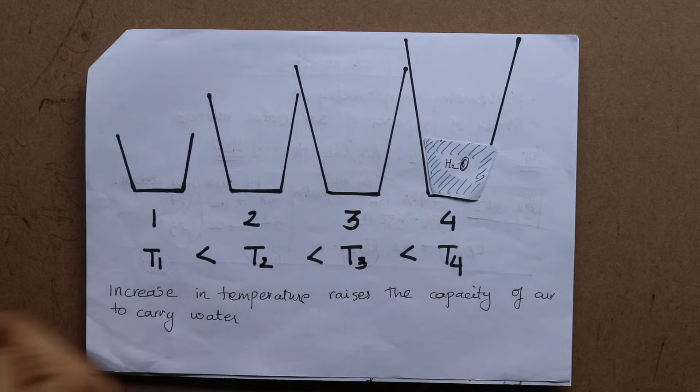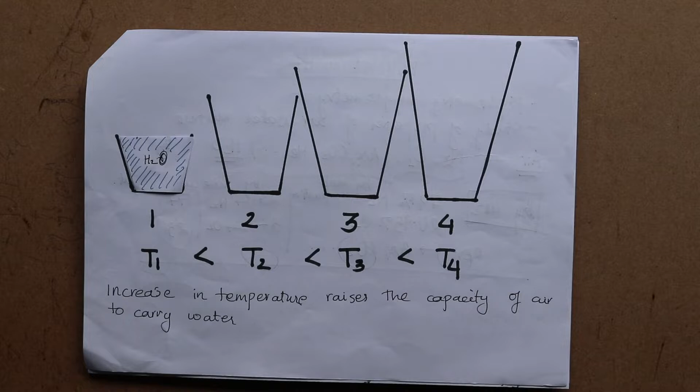Now, air, as we know it, again to reiterate, consists of dry air and water vapor. If we have ordinary air, that is air plus water vapor, and we start cooling it, what is going to happen is that as you cool it, the capacity of the air to hold moisture decreases. At some point in time, the capacity of the air becomes equal to the net amount of moisture in the air.

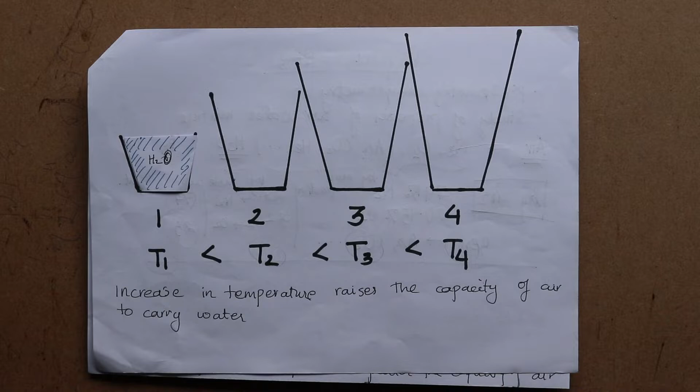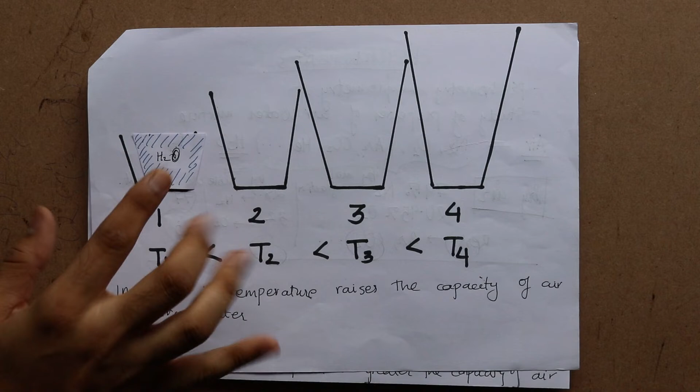The temperature at which this happens is termed the dew point temperature. Dew point temperature can be defined as the temperature to which air is to be cooled at constant pressure so that it becomes saturated with water vapor. In this condition, the air is completely saturated with water vapor—it cannot hold any more, because the capacity of the air to hold water is the same as the amount of water vapor present in the air.

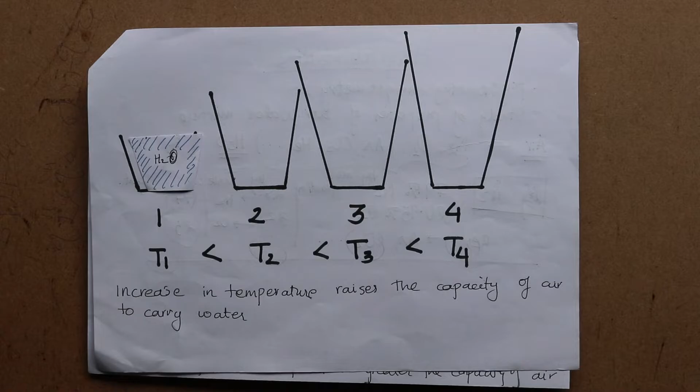Another definition we need to look at is adiabatic saturation temperature. To measure it and understand what it is, we have to look at a simple setup. Consider a long insulated channel containing some water, and air—unsaturated air—passes through it.

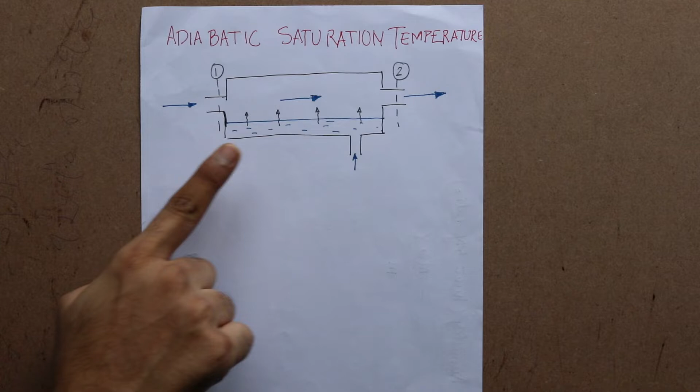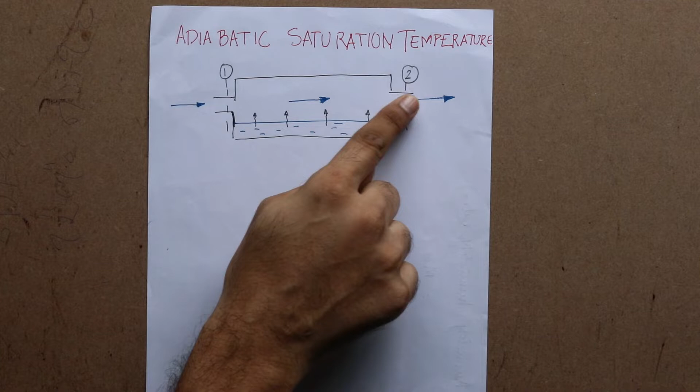As it passes through this channel, it absorbs some amount of water vapor. This channel length is such that at the end of the process, the air exiting is just saturated. As the air starts absorbing the water vapor, this causes the temperature of the air to reduce.

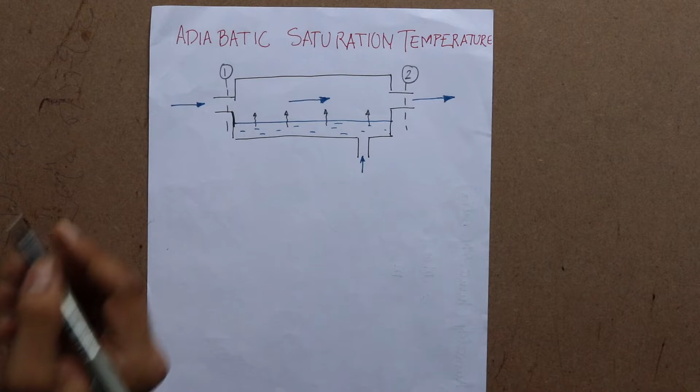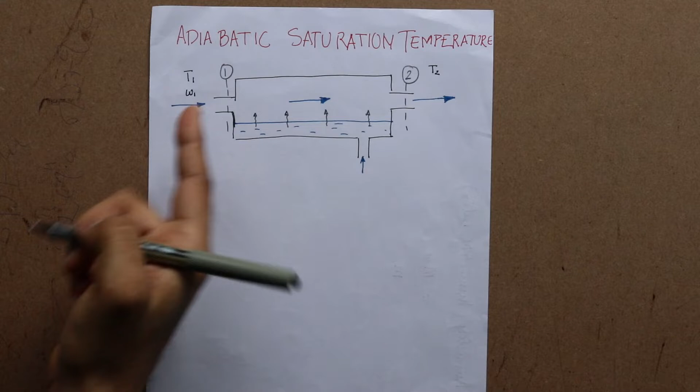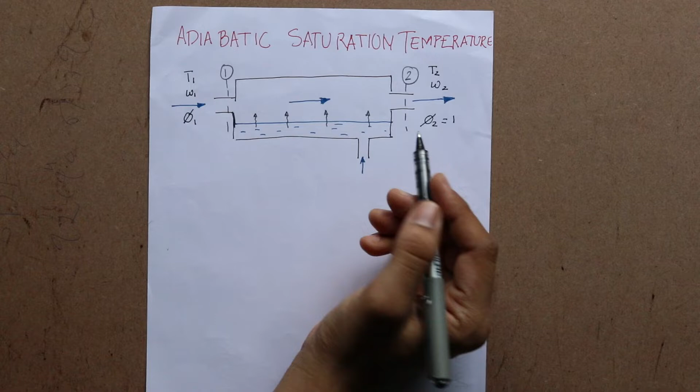Let's assume the air temperature initially was T1. After this cooling, the temperature will be T2. If the specific humidity was W1, the final specific humidity is going to be W2. Similarly, if initially the relative humidity was phi 1, the final humidity phi 2 is equal to 1, since at the end it is in saturated condition. As it is passing, an amount mf dot of fluid is going to be absorbed into the airflow every second.

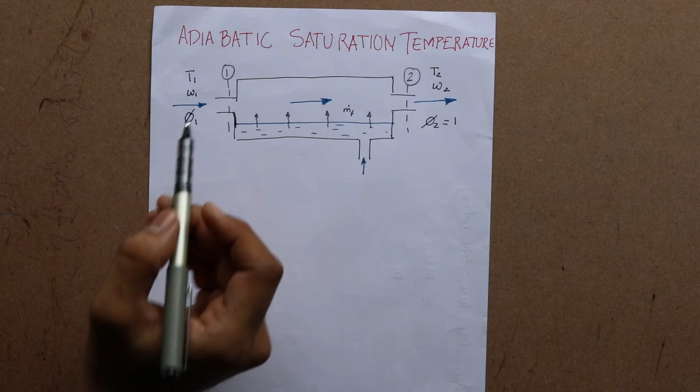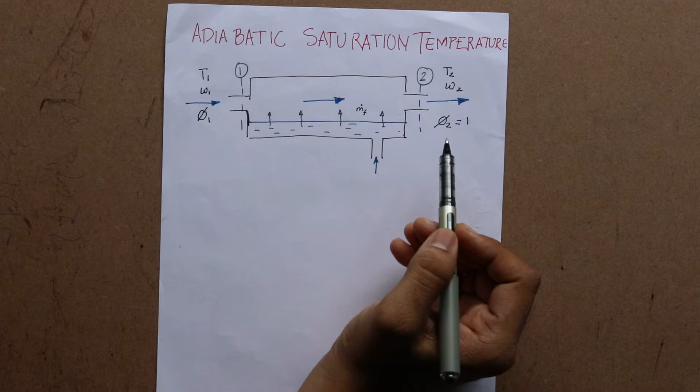To recap, we have air flowing into a long insulated channel initially at T1. This air is unsaturated, and at the final condition it is just saturated. As it passes through the channel, it absorbs some amount of water present in the channel, causing its temperature to reduce to a value T2. As the air exits the channel in saturated condition, this final temperature T2 is termed the adiabatic saturation temperature.

Now, part of the latent heat of vaporization, which causes this water to evaporate, comes from the air which is entering the channel.

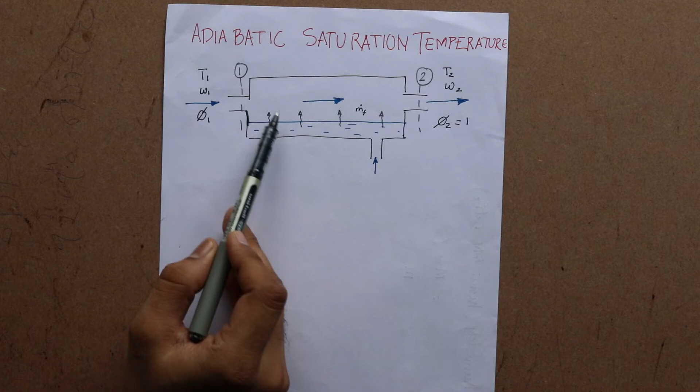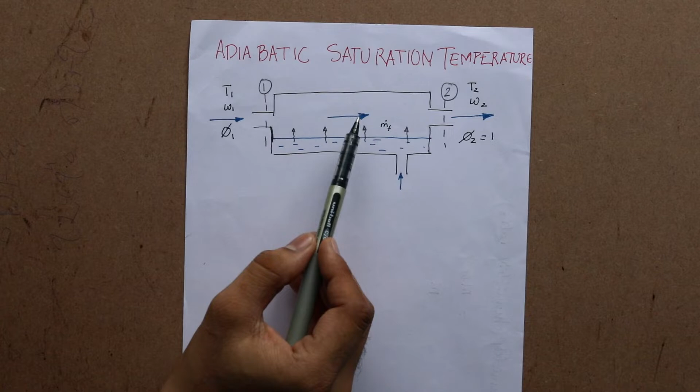Thus, this air loses heat, loses energy, which is given to the water in the channel, causing it to evaporate and mix with the air flowing into the channel.

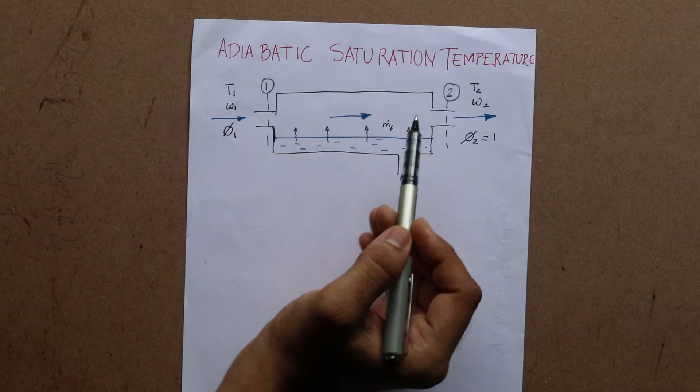Now we are going to analyze this as a steady state or steady flow process. We will assume that there is a constant amount of air entering the system and a constant amount of air exiting the system.

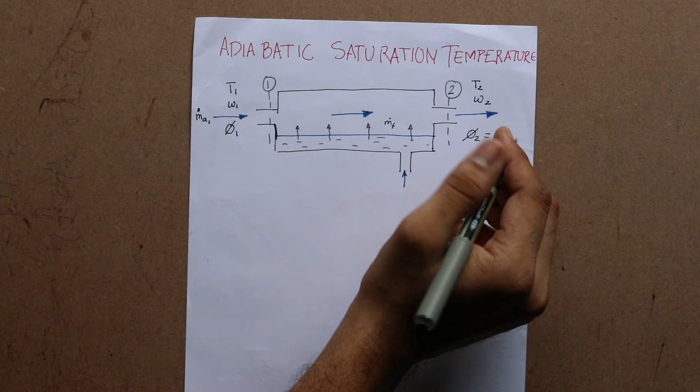Now this is dry air. We assume that the dry air entering here is MA1, or the mass flow rate can be given as M dot A1, and the air which is exiting this, even though it's saturated, the dry component is M dot A2.

Since this is a steady state flow, MA1 is equal to MA2.

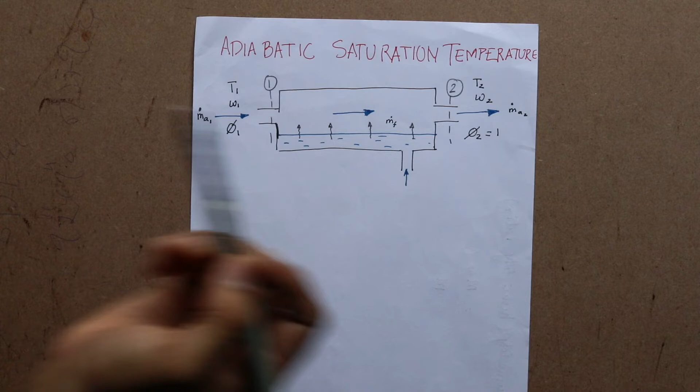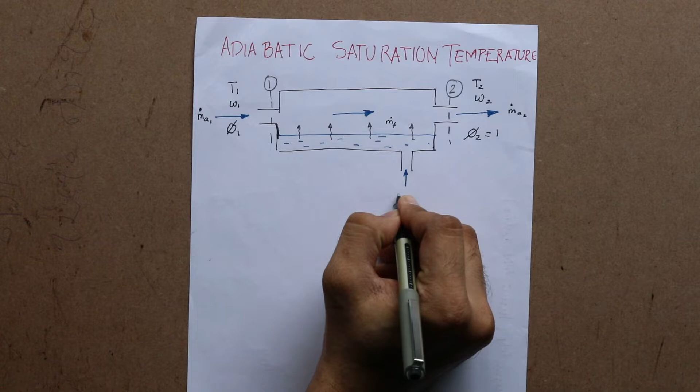Now, as we have seen before, this is also absorbing some amount of water, so naturally the water level would reduce. But since we are considering this a steady state process, we are going to introduce some amount of water, the same amount as that being evaporated. So if MF dot is being evaporated into the air stream, we are going to be introducing M dot F.

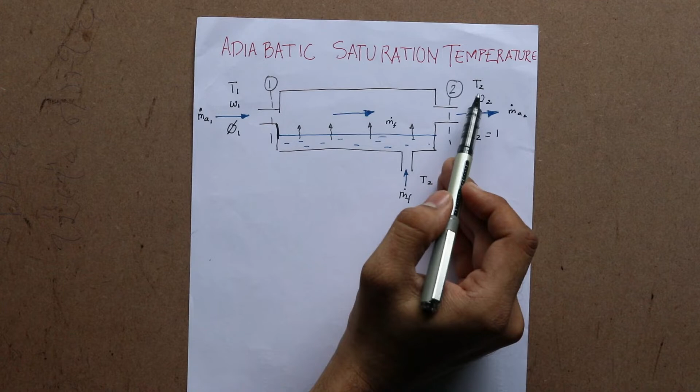Also, we are introducing water which is at the same temperature as the air exiting this - the adiabatic saturation temperature, that is the temperature of the air exiting the saturator device.

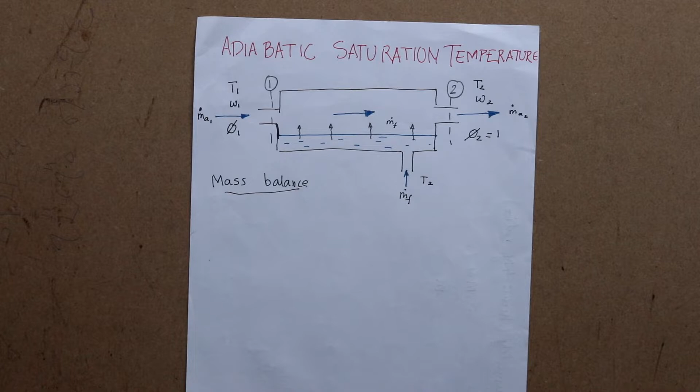So what we are going to do is analyze this mathematically. First we are going to do a simple mass balance, for mass flow of dry air.

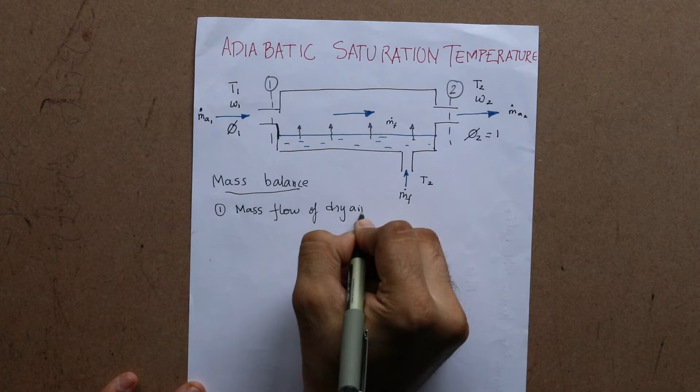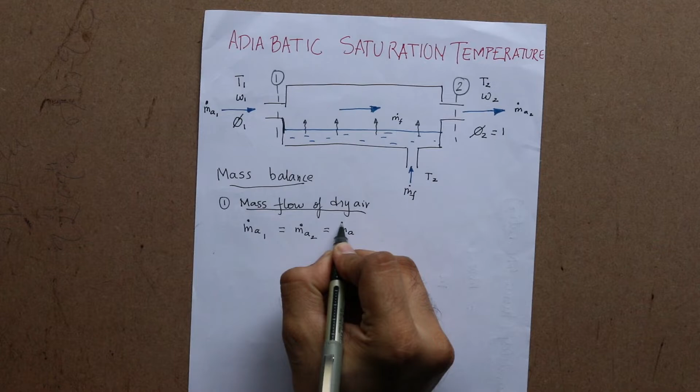Now in this case we assume it was a steady state process, so the mass entering the system is the same as mass exiting the system. So MA dot 1 is equal to MA dot 2 is equal to MA dot. That means the mass flowing in is the same as mass flowing out, equal to some specific value.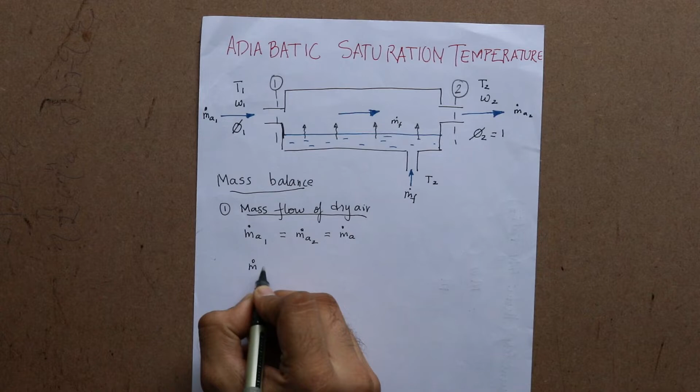Now we are going to do that for the vapor as well. So we can say that m dot W1, that is the mass of water vapor present in the air entering the system, plus m dot F, which is the rate of evaporation, is equal to m dot W2.

So we have mass of water vapor entering the system plus the mass of water vapor generated due to the evaporation process, equal to the mass flow rate of water vapor exiting the system.

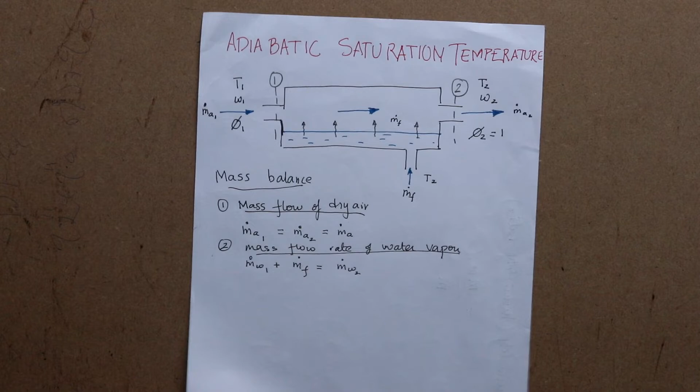Now let us simplify this. We know that specific humidity can be defined as mass of water present in the air to the mass of dry air. So we are going to substitute that here.

So we are going to get specific humidity at inlet into mass of air entering the system, plus m dot F - that's the same term - and again we substitute the same here, mass of air into W2, that is the specific humidity at exit.

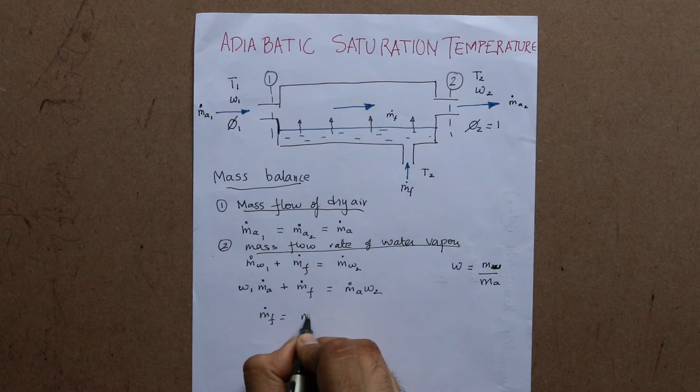Now we simplify this for m dot F, and we get m dot F is equal to m dot A into W2 minus W1.

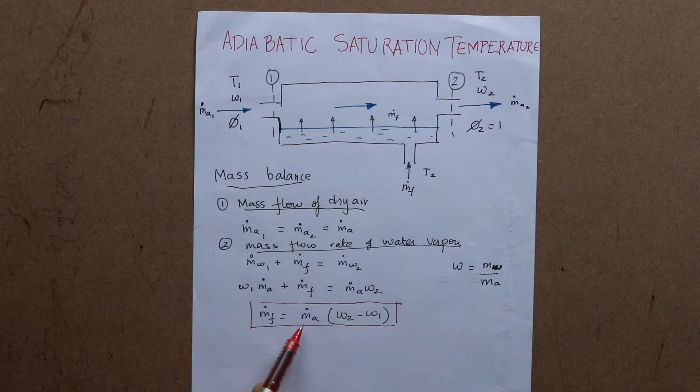So we have an equation which links the mass flow rate and the difference in specific humidity to the amount of water vapor being absorbed by the system. After performing a mass balance, we are also going to do an energy balance.

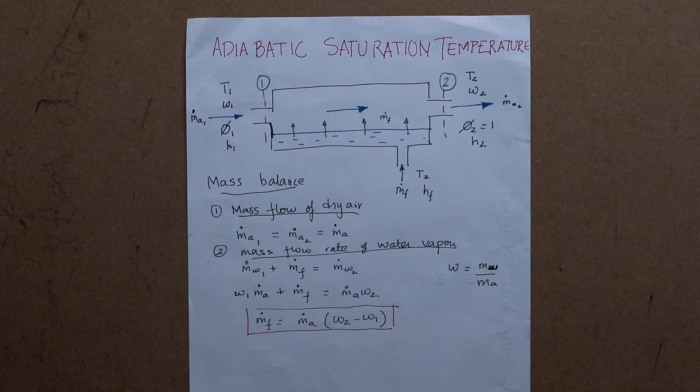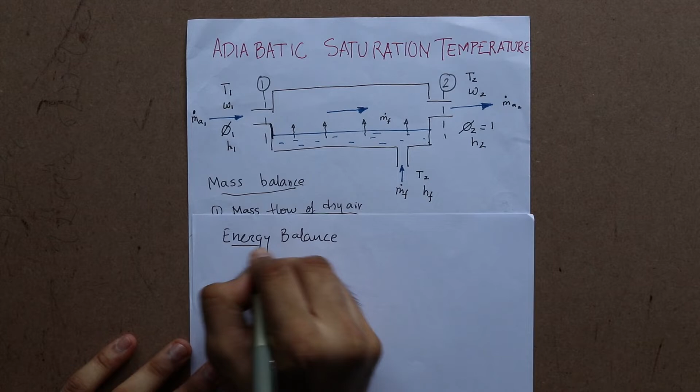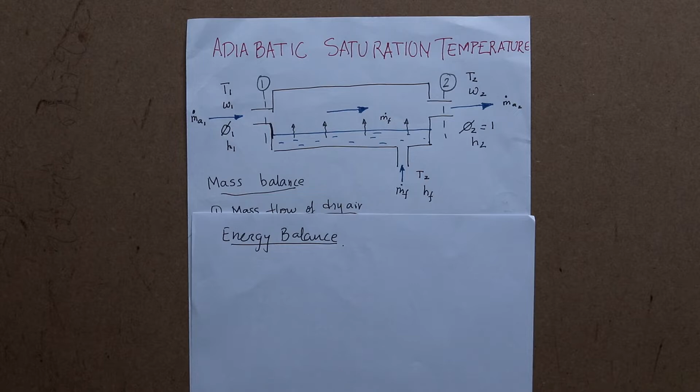Alright, so what we are assuming is that this is a steady state system, so the net energy flowing in is the same as the net energy flowing out. So E in is the same as E out.

Also we have some assumptions. One is that this is an insulated system, so there is no heat flow across the boundary, and this is a passive system, so there's definitely no workflow across the boundary.

Now the energy flowing into the system is comprised of energy contained by the air, that is the enthalpy of air, and the enthalpy of water. The energy flowing out of the system is the enthalpy of air, that is the saturated air here.

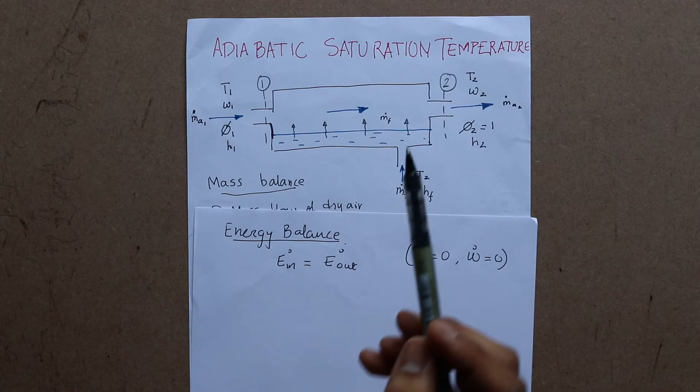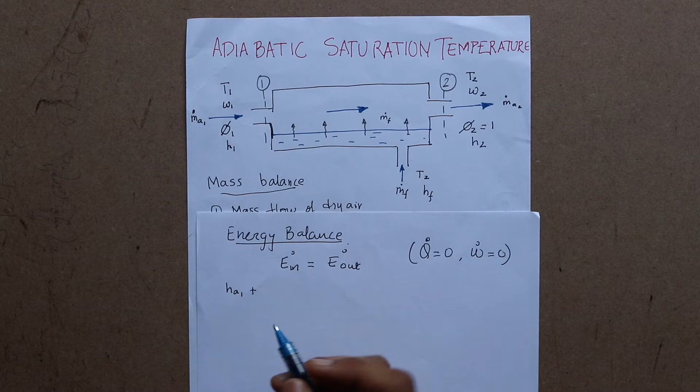We assume that the air flowing in has some amount of moisture present in it. So HA1, which is the enthalpy of dry air, plus W1, HW1, plus W2 minus W1 into HF2 is equal to HA2 plus

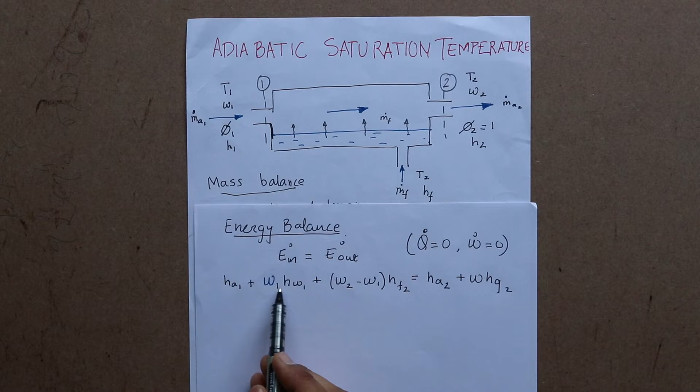WHG2. Now, what this means is that enthalpy of air coming into the system is comprised of enthalpy of dry air plus enthalpy of water vapor present in the air. That's why it's just W1 into enthalpy. So it is specific humidity into the enthalpy of water vapor in the air at the inlet, plus difference in specific humidities, that is the enthalpy of water due to evaporation, is equal to HA2, that is the enthalpy of dry air at outlet, plus enthalpy of water vapor at outlet.

Alright, now what we are going to do is we are going to solve for W1, and once we solve for W1 we are going to get the following equation.

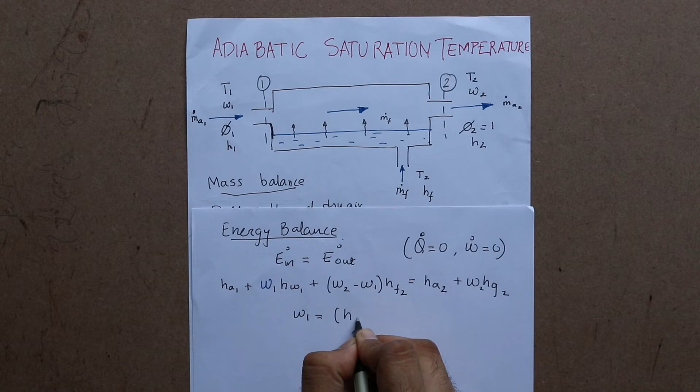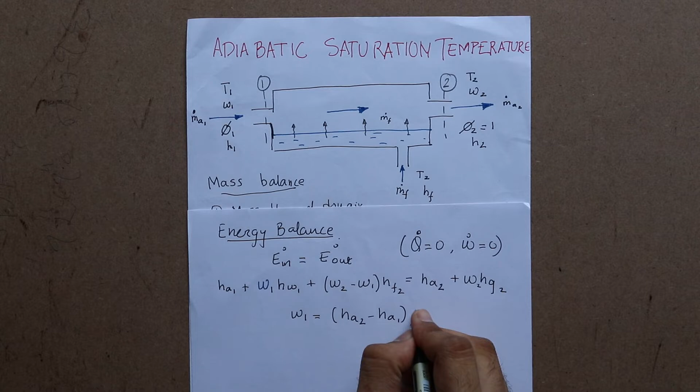W1 is equal to HA2 minus HA1, that is the difference of enthalpies of dry air, plus W2 into HG2 minus HF2, whole divided by HW1 minus HF2. We simplify this further.

So we can simplify H as Cp dt. So Cp of air, T2 minus T1, plus W2 into HG minus HF, which is equal to HFG2 divided by HW1 minus HF2. This is equal to W1.

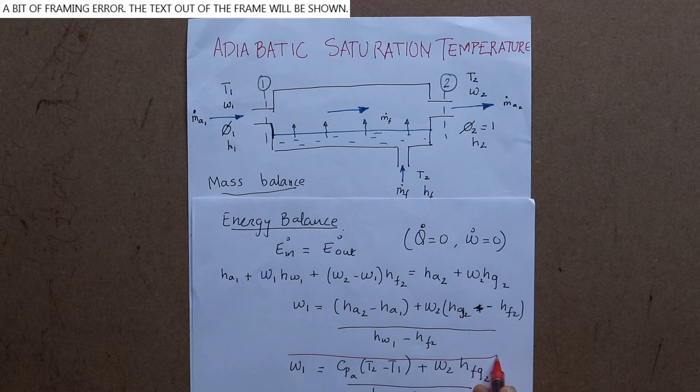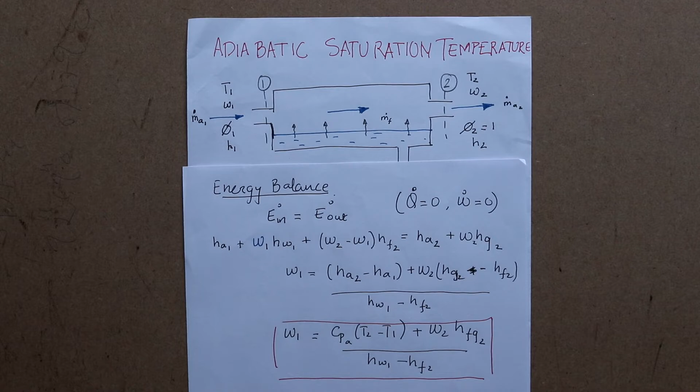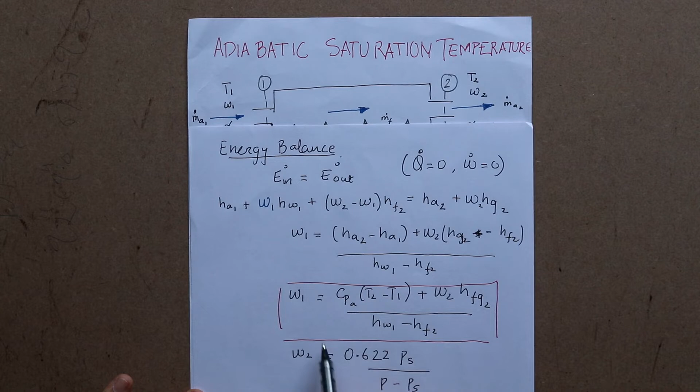Now, W2 in this case is equal to, from earlier, 0.622 PS upon P minus PS. This is coming in from your earlier last class, where the specific humidity at saturated condition, you get this formula.

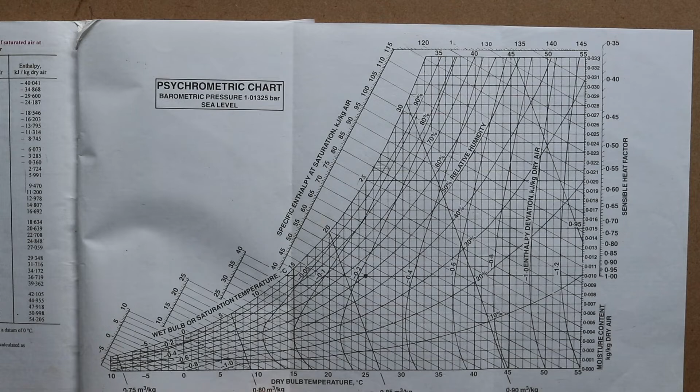In psychrometrics, to obtain different values of enthalpy, specific humidity, etc., we make use of something called a psychrometric chart. Psychrometric chart is nothing but a plot of dry bulb temperature versus specific humidity.

Now, this plot also has values for specific enthalpy, wet bulb temperature, and volume of the mixture, specific volume of the mixture, amongst a few other values. Now, here we see increasing values of dry bulb temperature on the x-axis, increasing values of specific humidity on the y-axis. On this curve, we see increasing values of wet bulb temperatures.

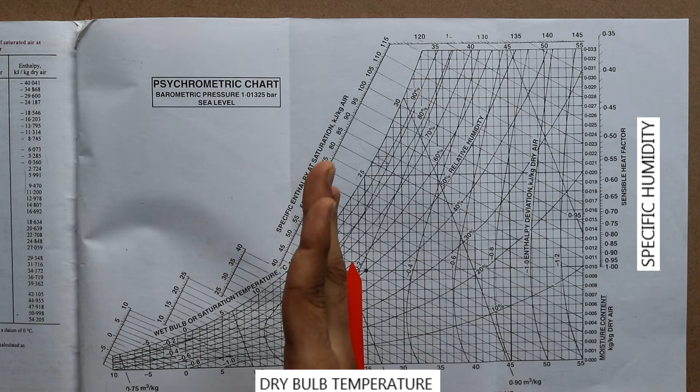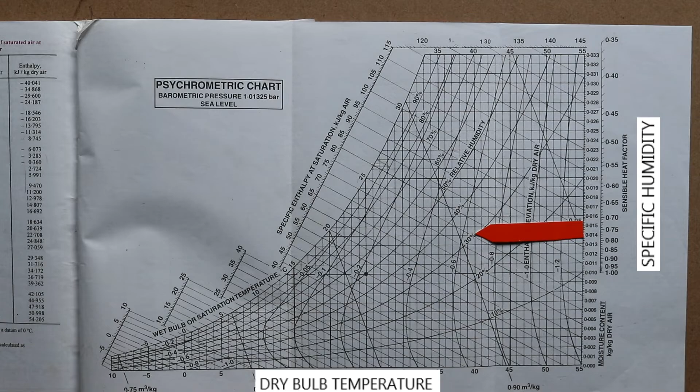We can see increasing values of wet bulb temperatures. Now, constant values for dry bulb temperatures are in this direction. That means if you travel vertically upwards, they are going to be constant dry bulb temperature lines, and if you travel horizontally, they are going to be constant specific humidity lines.

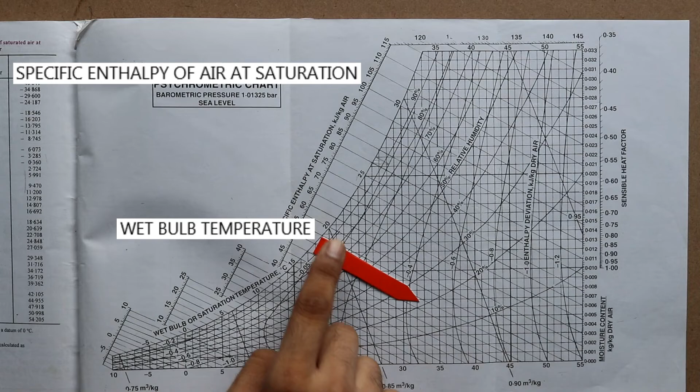Here we have the wet bulb or saturation temperature values at the edge. Now these saturation temperature values are constant along this direction. You can see lines along this direction, along which saturation temperature or wet bulb temperature is constant. Also, you have values for specific enthalpy at saturation. Now these lines are collinear to the wet bulb saturation temperature lines, so the lines of specific enthalpy at saturation coincide with the wet bulb temperature lines. Alright, so they both have the same lines in this direction.

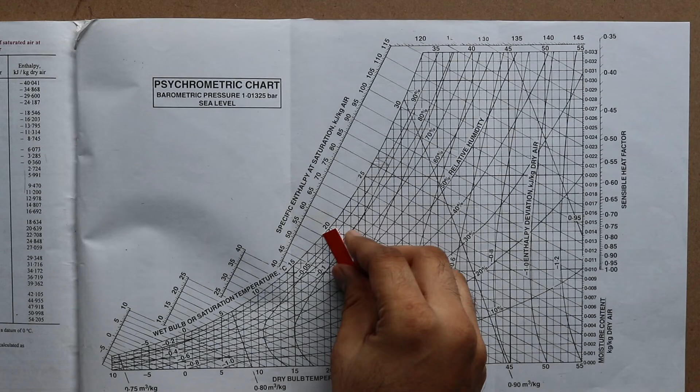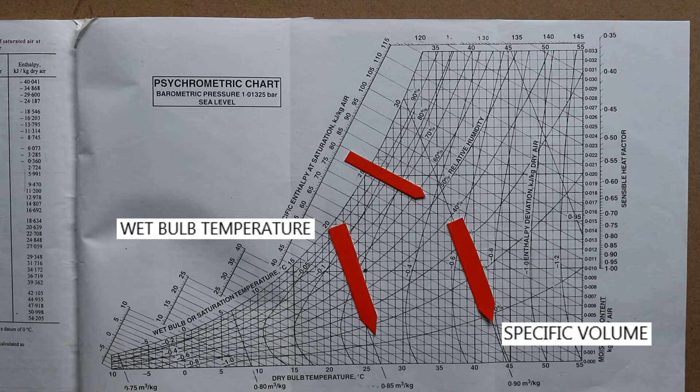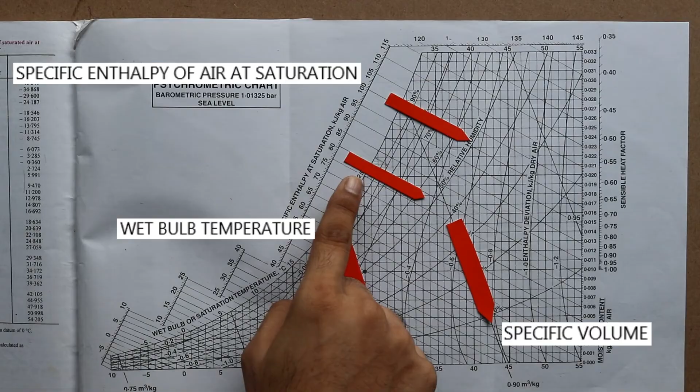Also, you have the specific volume lines. Now these are slightly different, they follow these lines. So you have got constant wet bulb temperature lines, and you have got constant enthalpy lines. You have got constant volume lines, and you have got constant enthalpy or wet bulb temperature lines in this way.

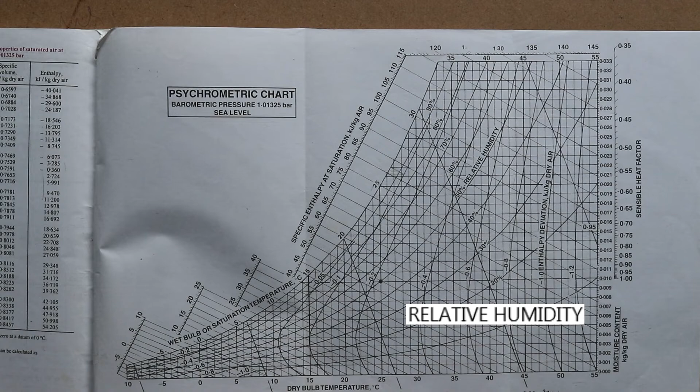Also, you have got some lines in this direction. As you can see, these are the lines for relative humidity. As you go from here till here, your relative humidity increases.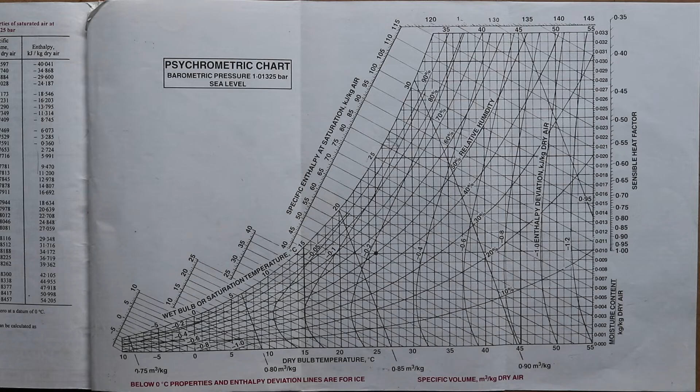Next, we are going to represent some common processes on the psychrometric chart. One of the first processes we are going to learn is something called sensible heating or cooling. Sensible heating or cooling is when you either add or remove heat from whatever you are trying to heat or cool, and there is no phase change involved.

In sensible heating or cooling of air, there is no change in the specific humidity of the air, because you're not allowing any humidity to enter the air, or you're not allowing any humidity to escape the air. The specific humidity of the air is going to remain constant.

If we represent sensible cooling of the air, we'll be moving from right to left, so decreasing values of dry bulb temperature. Sensible cooling of air is represented by a horizontal line moving from right to left. Similarly, sensible heating is represented by a line moving from left to right. Let us assume the case of sensible cooling, so we are moving from higher dry bulb temperature to lower dry bulb temperature.

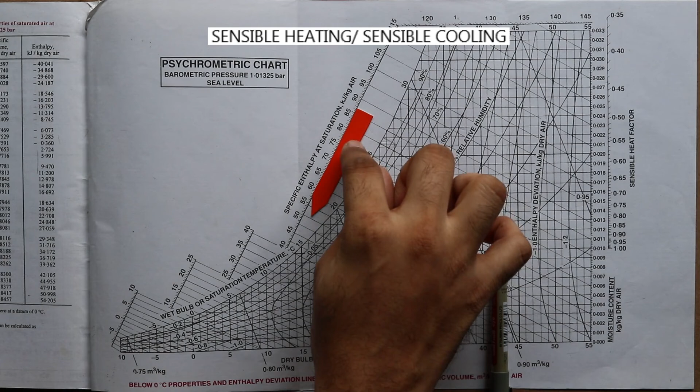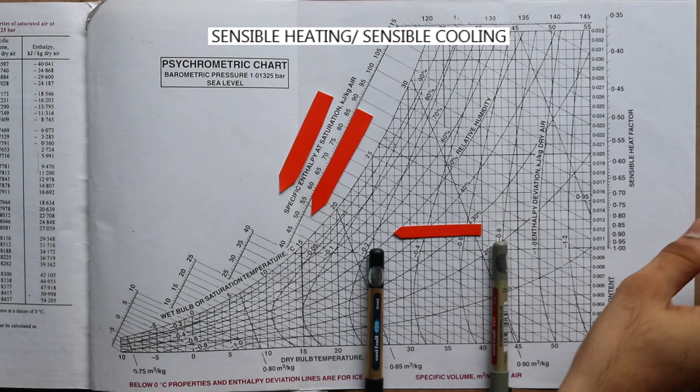We will also notice that the values of enthalpy are also reducing. You can see these lines show that our enthalpy values are reducing. Also, our wet bulb temperature is reducing. So in the case of sensible cooling, you have constant specific humidity, reduction in enthalpy, reduction in wet bulb temperature, and a reduction in dry bulb temperature.

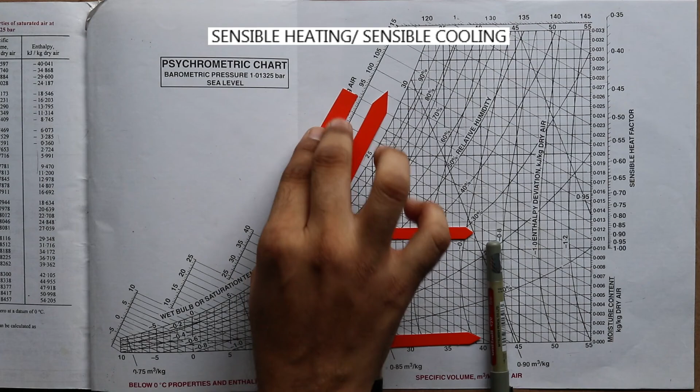For sensible heating, it's the opposite: constant specific humidity, increasing values of dry bulb temperature, increasing values of wet bulb temperature, and increasing values of enthalpy.

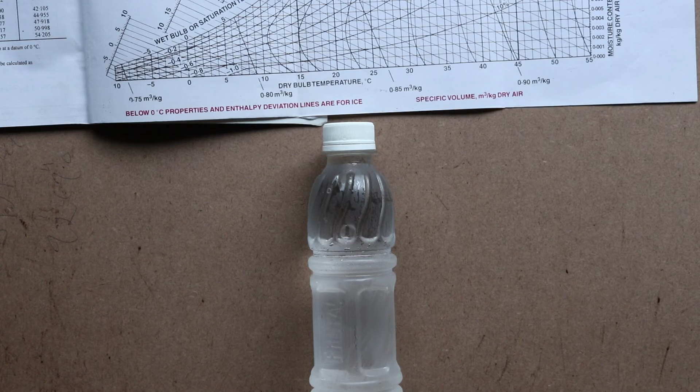This bottle has been kept in the fridge for a while. As soon as I've taken it out of the fridge, water started condensing on its surfaces. Now, we will utilize the psychrometric chart to explain why this happens.

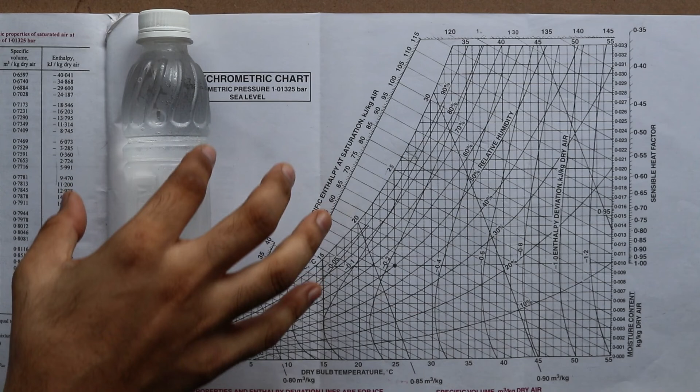Once I've taken this bottle out of the fridge, the contents of this bottle are very cold. Due to conduction effects, the air surrounding this bottle also cools down. As it cools down, the temperature of the air reduces, and this causes a reduction in wet bulb temperature.

At some point, the temperature of this air is going to reduce to such an extent that the air surrounding it can no longer hold water. That means this air surrounding the bottle is now saturated. At this point, you have a straight line which touches this saturation curve. Once it touches the saturation curve, the excess moisture in the air surrounding it is going to start coming out of phase, out of the mixture of air, and it's going to start condensing.

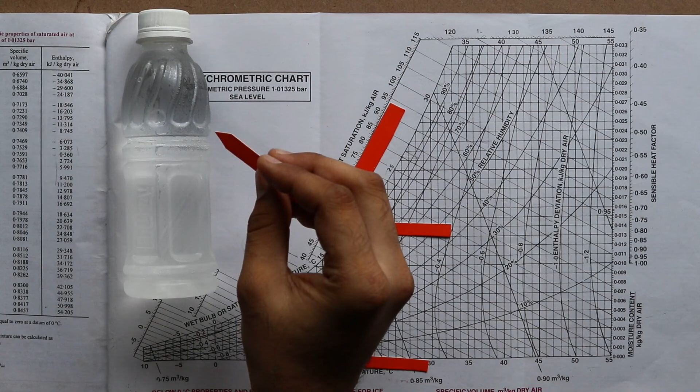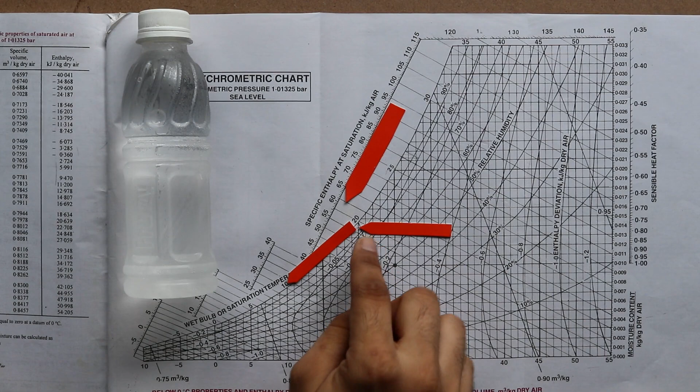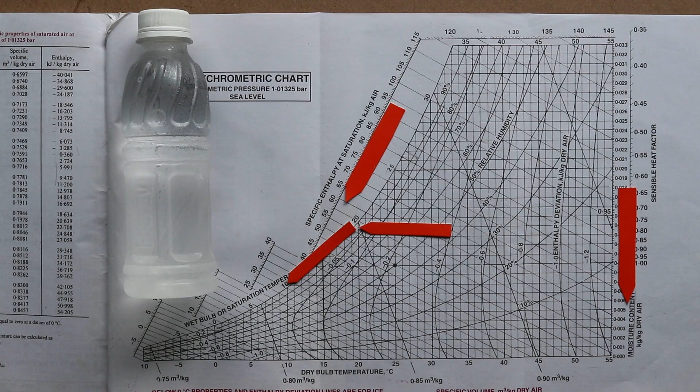As soon as it starts condensing, the water vapor present in the air is going to reduce. So it's going to move from horizontal to along this direction, meaning the net water vapor content is also going to reduce. This is a process of cooling and dehumidification, and you can see this happening commonly in day-to-day locations such as refrigerators or air conditioning units, where water comes outside and is collected and disposed of.

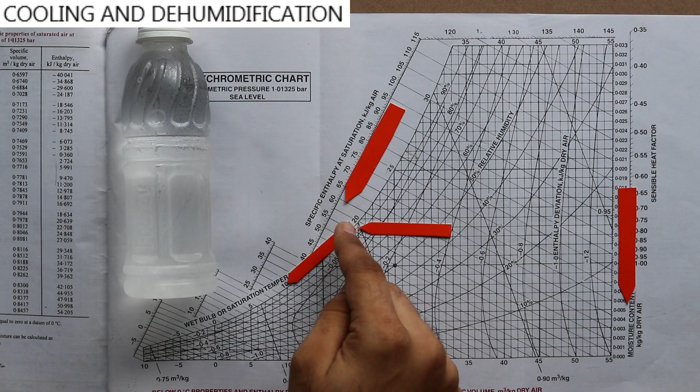So as soon as it cools, it reaches saturation. After saturation, water is going to come out of phase and condense here, and that causes a reduction in humidity.